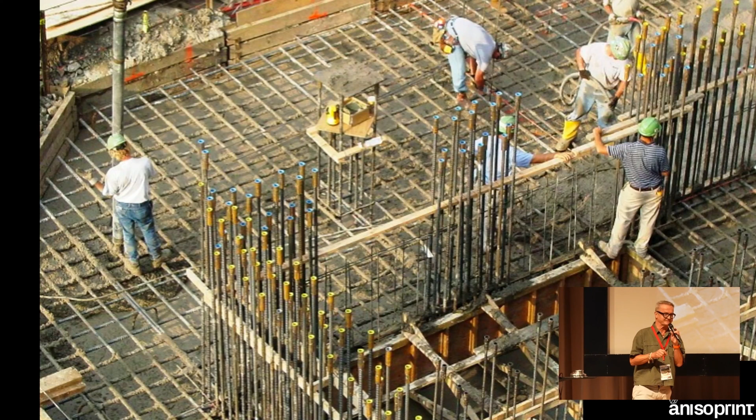Let's get started with this analogy. Skyscrapers - millions of them are built on this planet, and we ask ourselves, how does this work? Trillions of tons of concrete building upon each other? It doesn't work, because it only works because of this steel reinforcement. The secret of this steel reinforcement is not only that it gives stability, but it also distributes the forces internally in the structure to non-critical areas. This is actually a science in itself.

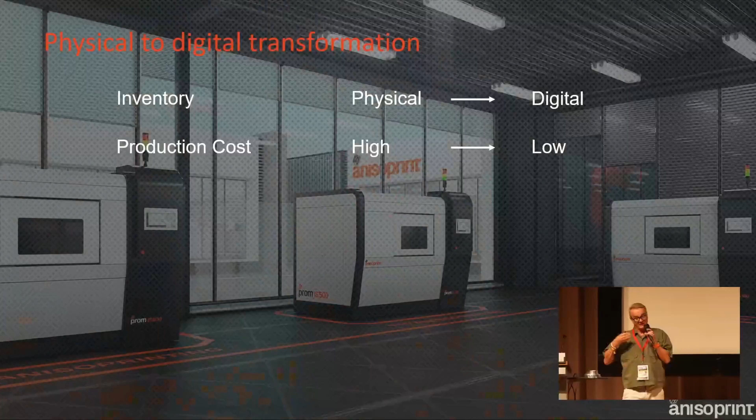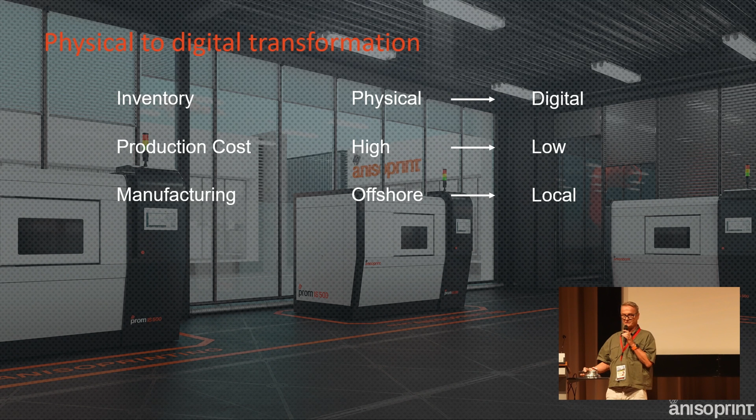Why did I show this? Because in a lot of industries we can actually see a kind of revolution when it comes to digital things overall. Talking about inventory, it's a huge cost factor in industry, and nowadays a lot of companies already went from physical to digital inventory. Talking about production cost, you face it every day in conversations with your clients - they all aim to have lower production costs with their machining. Manufacturing - we experienced it personally in the COVID crisis with supply chain issues, and now more and more companies are moving from offshore to local production.

Logistics, from global to last mile - we want to avoid longer logistic cycles with our physical goods. And this is true for all the lifetime I've spent in this industry: product development needs to be pretty fast. And demand planning, going from uncertain to predictable.

3D printing does not solve everything. I'm not here to hype 3D printing again, because we've all experienced the last almost 40 years of hype, disillusion, hype, disillusion. We want to solve very specific problems, and that's why we are here. For your clients, yes, it could lower production cost, free up machinist talent to do more precious work in the workshop, improve profitability, have shorter product development cycles, faster changeover and product scaling, and reduce downtime of the machines.

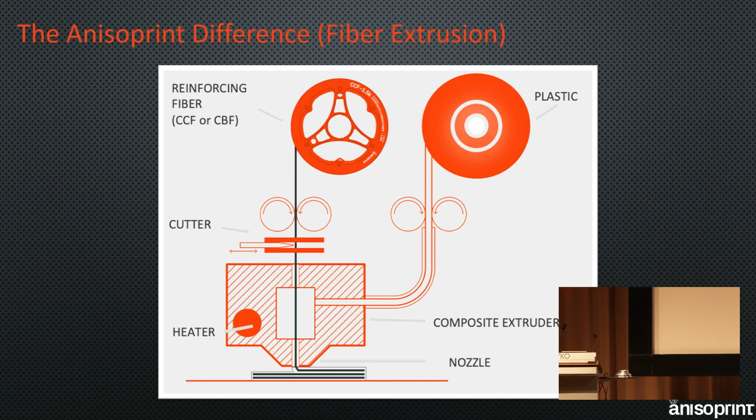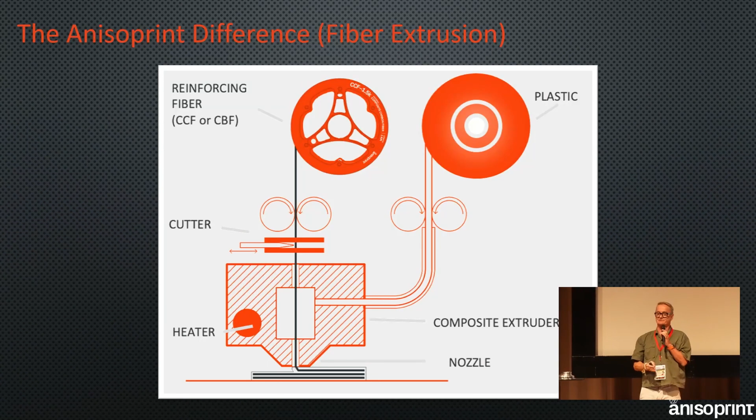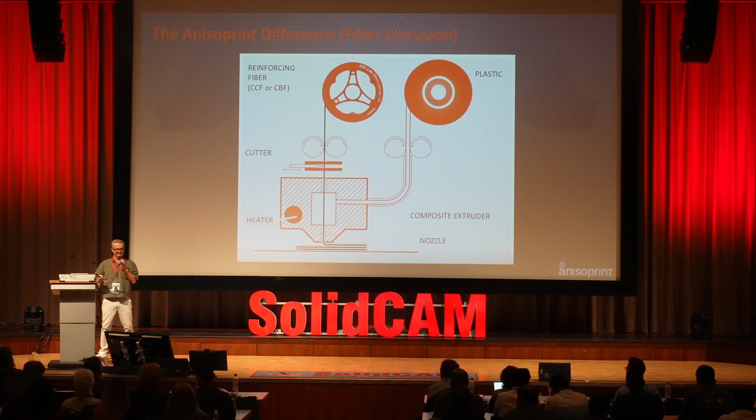Now let's dig a little deeper into our technology, which you can visit outside in the exhibition. We are, first of all, FDM printers, which is pushing plastic through a nozzle and laying it down layer by layer. But our printers have a second nozzle besides the plastic nozzle, shown here. What they do is transfer a reinforcing fiber - in our case carbon fiber or basalt fiber, which is a natural product - through this nozzle, and on the side we push plastic in it too. So it's a co-extrusion of plastic with continuous fiber. We have a little cutter there, because from time to time you need to cut this fiber to lay down the next fiber routing.

What it also does is allow our customers to do so-called free fiber placement. On the right side, for instance, you see a fiber placement specifically done in this part to catch up forces at certain points - almost the same as the steel in concrete, where it distributes the loads. We can do this, but even more - on the left side you see we can print internal lattice structures. If you want an ultimate strong part with physical properties like aluminum or even steel, you should potentially start with this kind of lattice infill structure, because lattices also distribute forces equally in the part, in all directions.

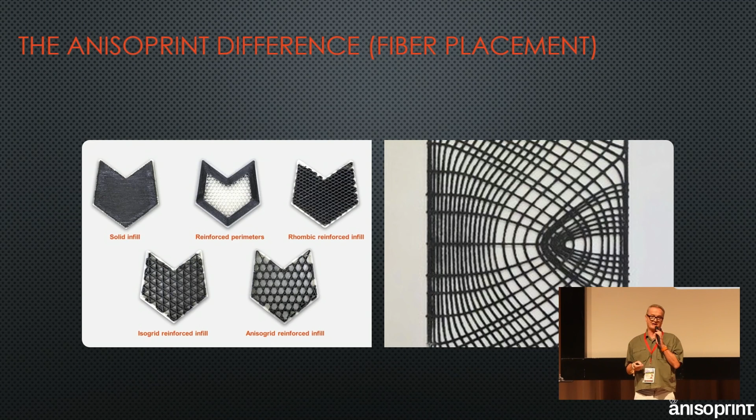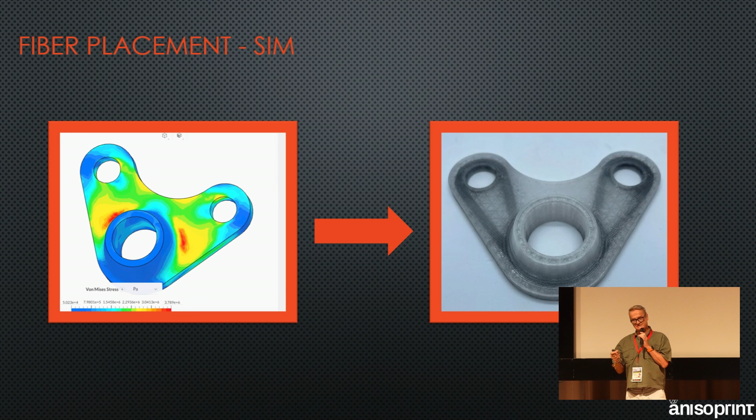What we also can do, and we currently applied for a research license for SolidWorks simulation, is place fibers actually at the point of need. This illustration shows it quite easily - think about this part held in the middle and pulled on the left and right side, and the fibers we laid down actually catch exactly those forces where the part gets pulled. The research license aims to get into SolidWorks simulation, figure out the stress distribution in the part, and automatically give a fiber routing path into our slicing software. That's what we aim for, and we just started this process.

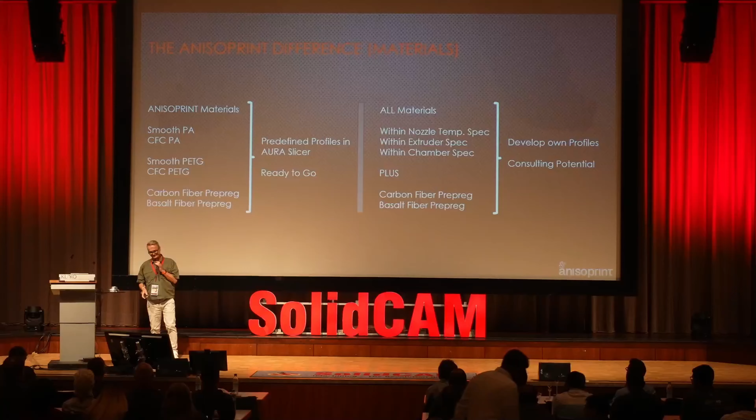We also support an open material system. The only material you are required to purchase from us are the fibers - the basalt fibers or the carbon fibers. With the plastic materials, you are absolutely free. I'm a plastics engineer, by the way, so I'm a firm believer there's a reason why we have 100 types of plastics, because each and every plastic has been purposefully developed for a very specific reason. And not every plastic is good for a CNC shop, for instance.

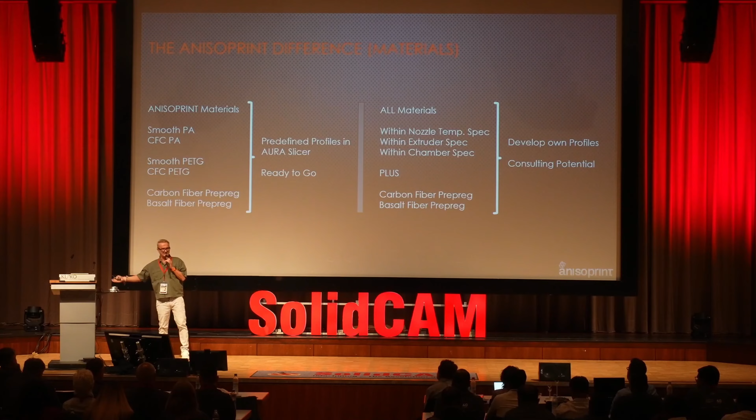Hygroscopic materials which collect moisture and change properties and dimensions are not very good for a CNC shop when getting in touch with cutting fluid - it simply doesn't work. In this case, you should choose a material which is non-hygroscopic and reinforce it with fibers, by the way. So you are free to choose any kind of plastic which is within the specifications of this specific printer, and we have different printer models. We also support our software and materials, so it's an ecosystem which we can give to your clients.

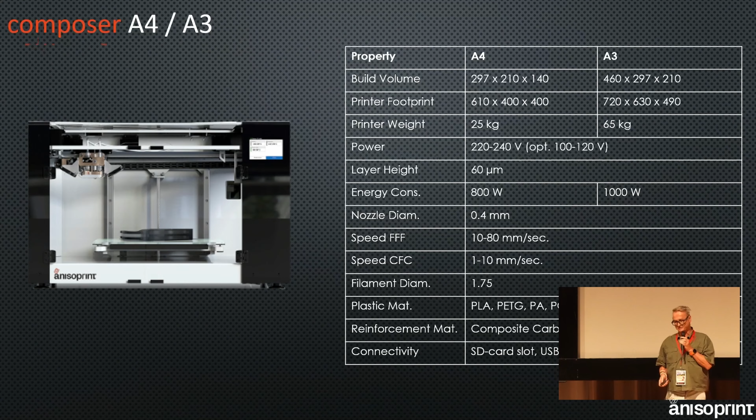Product lineup, I think I can skip this since Jörg already mentioned it. These are the desktop series printers. They usually support your industry and your customers. I think these are the right fit for producing tools, jigs, fixtures, and soft jaws in a very strong, reinforced way, not a weak plastic way, so they really do what they are expected to.

Outside you can also see our new Composer Nova. Its specialty is 4 printheads and a printhead changer, which allows for more diverse materials. This allows for soluble supports, for instance, which you can print and wash off, or different types of fibers with different print speeds, because thicker fiber prints faster than thinner fiber.

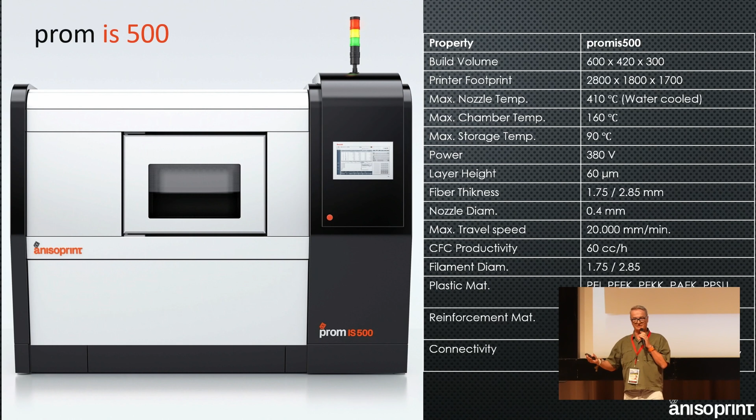The ProM IS 500 is the really big machine, mostly found nowadays in R&D of larger organizations and universities. The temperature range and heated chamber allow for printing high-tech plastics like PEEK, PEI and Ultem together with fibers, which is an exceptional way to do it. So aerospace and transportation industries in general show high interest here.

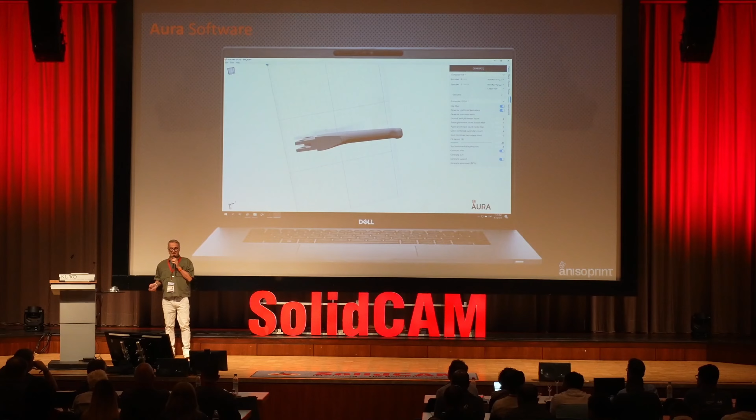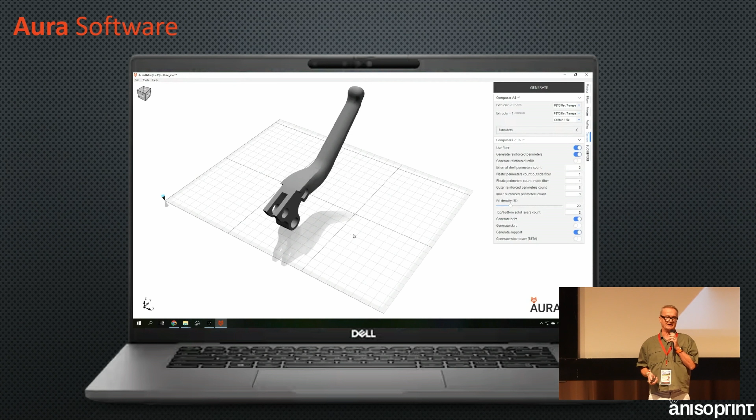Software is our own development, so we can import STL files or step files directly from your CAD environment, place the part, change the orientation, place the fibers, and create a G-code file which we later use at our printers.

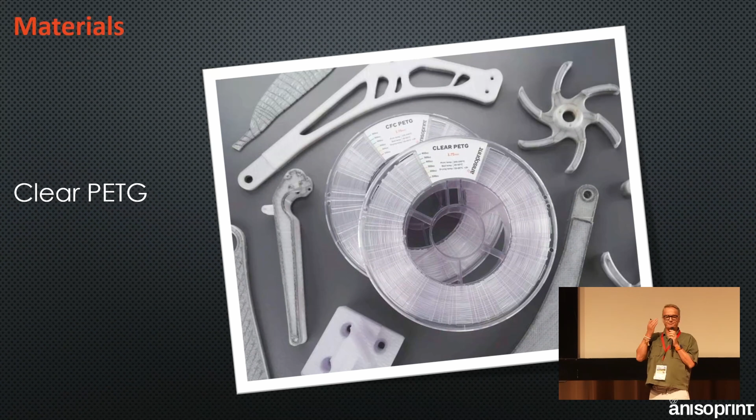For materials, as I said, we provide the carbons and so on, but the other plastic materials you can buy from the free market. Like Polymaker, for instance, is one of those filament producers where you can buy material.

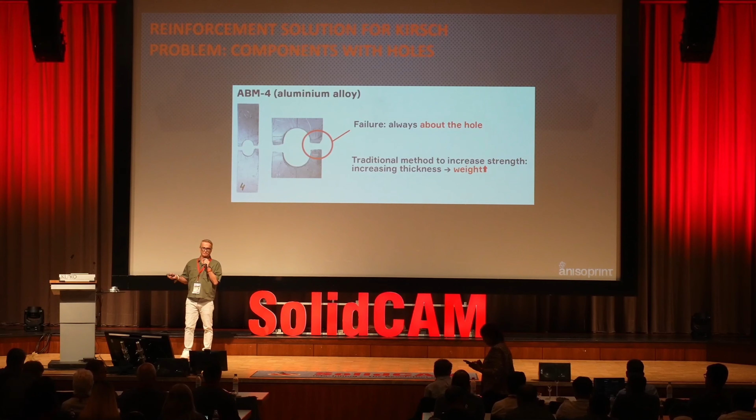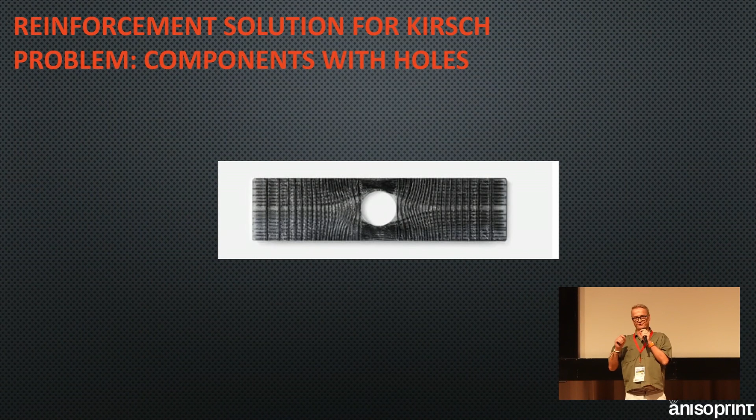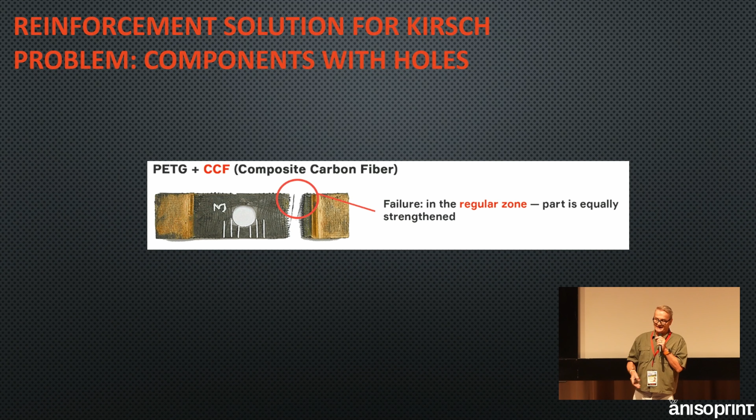Let's talk about applications, starting with a mechanical problem every mechanical engineer knows: the so-called Kirsch problem. This hole reduces the geometry, and when you pull the part, it will break there. So we prepared a print where we changed the routing of the fibers to absorb those specific forces and stresses. When you test the part, it doesn't break at the hole, but at a regular geometry. Carbon fiber used in a real professional way can solve those problems.

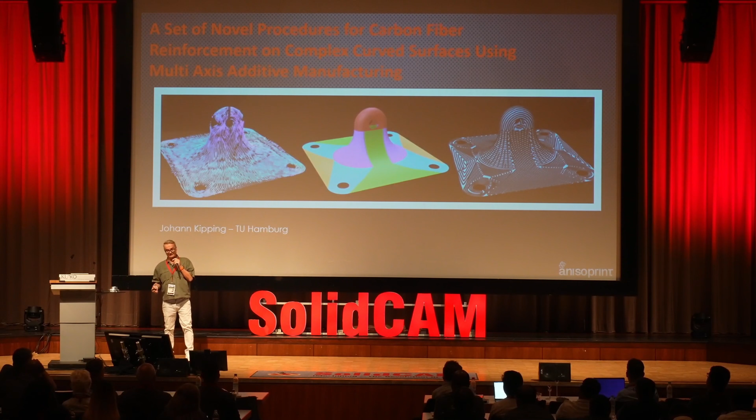Here's another study from the University of Hamburg, working in cooperation with Airbus. They're thinking about placing fibers in 5-axis, which we will also support sooner or later together with 5-axis robots.

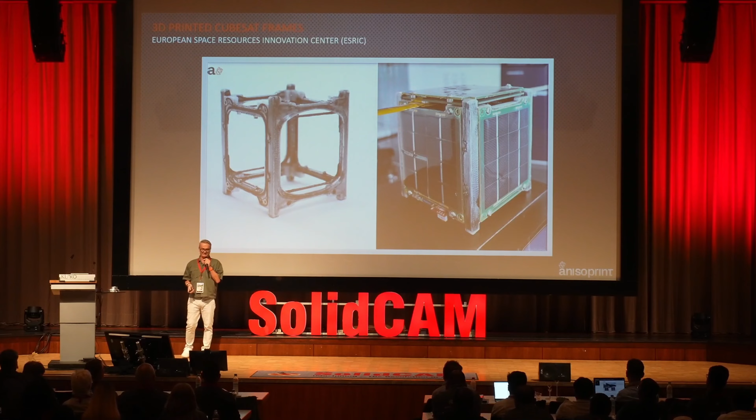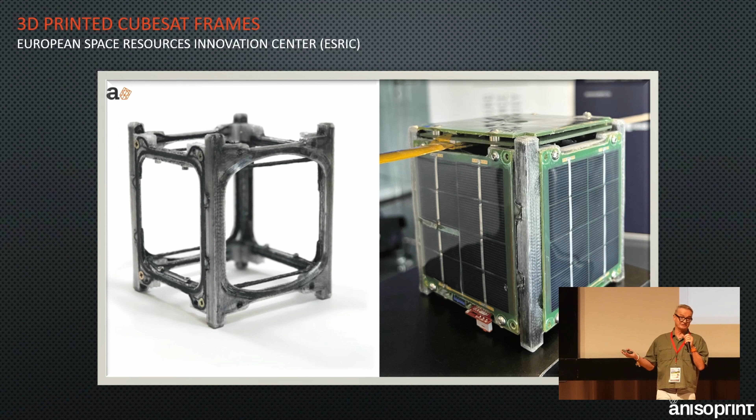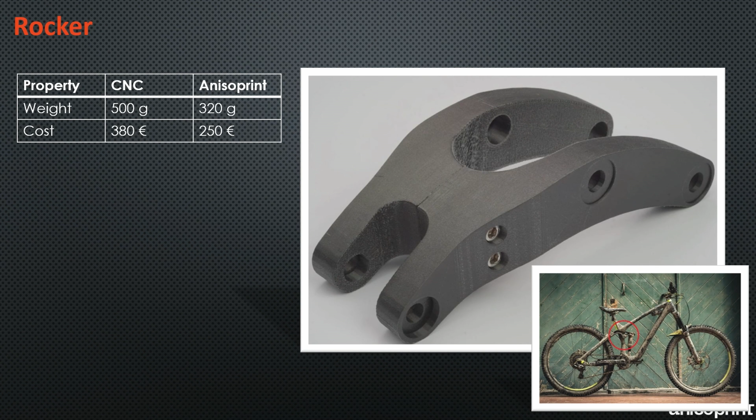Another interesting research and development project involves cube satellites, which are sent into space by the thousands. We can print the frames, because weight is of critical nature when sending something to space. Regular parts, like this rocker for a mountain bike, withstand the forces. They replace steel parts and aluminum parts.

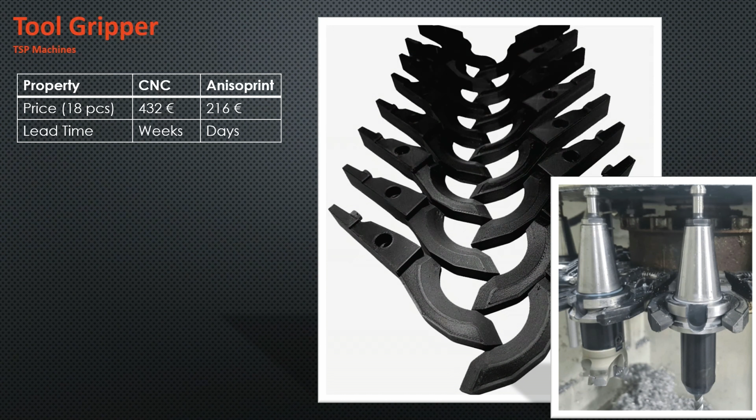Another example from Formula Student. And here's one more from your industry: a tool holder. Sometimes you need those tool holders to be very specific for specialized tooling, and then you simply print them overnight. You pick them up the next day, put them in, and it works.

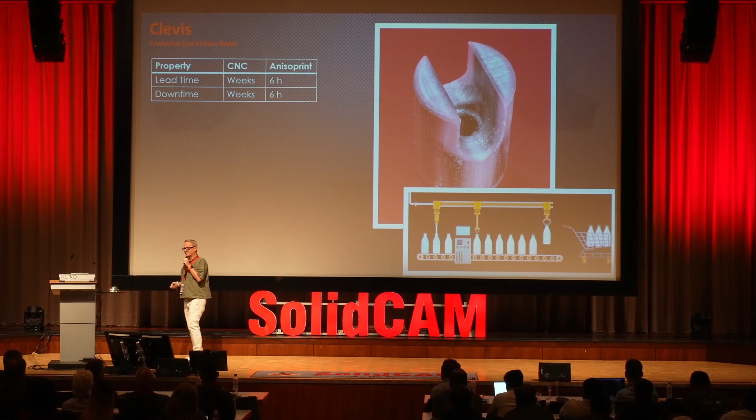Another example from packaging machinery: end-of-arm tools which are used by robots or mechanics. End-of-arm tooling is also a very good application. Whenever you need a gripper which holds something, or a vacuum gripper where you can actually print the vacuum channels, you don't need to mill two halves and put them together. It's as simple as this.

We are competing here with the status quo, because machine costs are the critical performance indicator in every CNC shop. The hourly cost of your CNC machine is the most important driver. So we need to think about using this highly expensive machinery for the highly professional jobs, while small jobs like tools, jigs and fixtures could be done by a 3D printer. There is immediate value for your clients, and if you educate them, they see that this system works.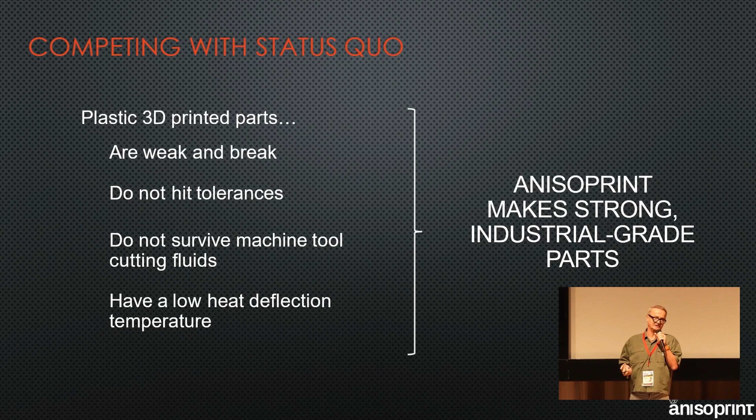3D printing is always considered to produce weak parts. No, we don't - our parts are aluminum grade or steel grade quality in all dimensions. I did a little calculation for comparison: if you calculate a machine with depreciation, power cost, maintenance, tooling, consumables, and to some extent even space, you come to a serious amount of money this machine costs per hour.

The 3D printer has a shorter depreciation cycle, quite obviously, but it's so cheap in production that you'd immediately consider: why wouldn't I print things that could be printed, if they're strong enough, instead of using a CNC machine, and use my CNC machine for the real valuable work. Your clients will certainly at least think about this possibility, and amortization is really quick.